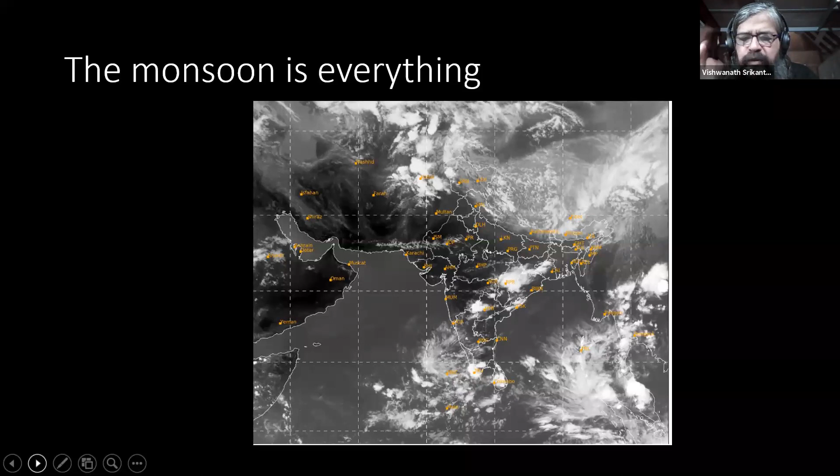What happened here was that the high-rise buildings and the buildings around exploited groundwater. More importantly, the metro which came in put in a station which was 3 to 4 stories below the ground. And for it to not get flooded, it started to pump out the aquifer and throw the water out, because for it, it was a nuisance. And so therefore, urban infrastructure, especially roads and things like metros and underground cables, do not talk to aquifers and do not talk to surface water.

This conversation between roads and hydrology and underground work like metros with the aquifer is also missing in the master plans that we develop for our cities, the land use plans, and the building bylaws that we develop for our cities. So as architects, designers, and urban planners, somewhere we'll have to start this dialogue going if water is a scarce resource and if water has to be protected.

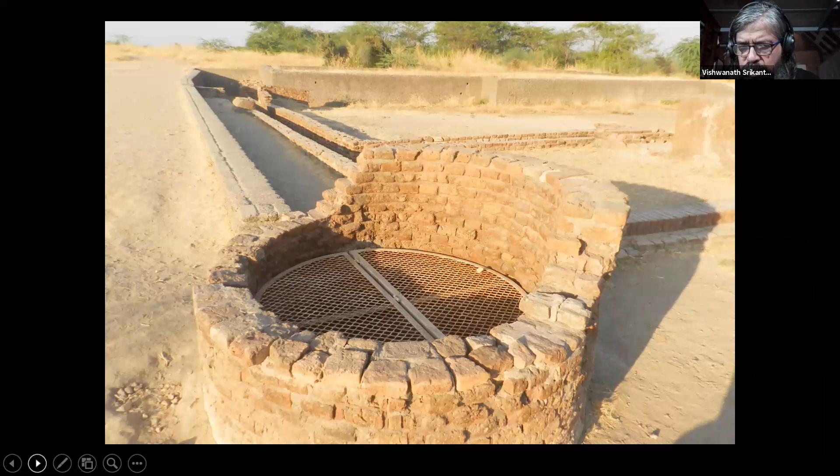Though it's named after the Indus Valley civilization, as it was called, or now referred to as the Harappan civilization or the Harappan Saraswati civilization, the means of drawing water was not from the river. Dholavira had rainwater harvesting systems. In Mohenjo-daro, every third house had a well. Lothal had a good drainage system. This is a picture from Lothal, and a well to draw water from.

And why was the well important? Because the well filtered the water from the river, was a steady place for supply of water, and it gave you clean water at your doorstep. So the science of digging for wells is a very old one. The wells themselves have a 10,000-year-old history. The oldest wells are about 9,000 BC, right? So that's how it is dated, and it's there in part of our history.

Now coming to history as destiny. For my city, as many other cities, we have to get local and understand what happened millions of years ago. So we have rock outcrops in Lal Bagh, which is one of the biggest parks in Bangalore, which are dated roughly 3,500 million years old. And what happened 3,500 million years ago and before that?

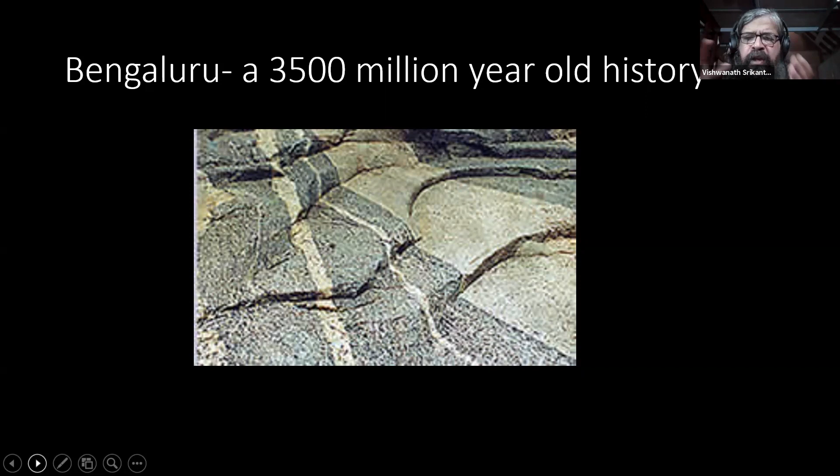The uplift of the rocks, the volcanic activity which caused Bangalore to go up to 920 meters above sea level, which gave us the weathered rock layer and the hard rock layer where the aquifer now stands, which holds water, and the fact that there's no perennial river flowing in the city, is a 3,500 million year old history.

Also interesting for us as a city, and for many other cities to find out their histories for themselves, is that about 100 million years ago, Madagascar separated from the Indian plate. And as the Indian plate moved into the Asian plate and caused the Himalayas to rise, it also caused the Gangetic Basin to sink. And because of that sinking and geological activity, and then the silt distribution which came through the monsoon rains hitting the Himalayas, we created one of the most fertile regions of the world in a continuous history.

So the Indo-Gangetic Basin has had an extremely high concentration of population since time immemorial, right? Since agricultural civilization began. And that fact will impact us now, because as these areas urbanize, we will have very high density of population in already dense regional areas. That's something that history has given us and geology has given us.

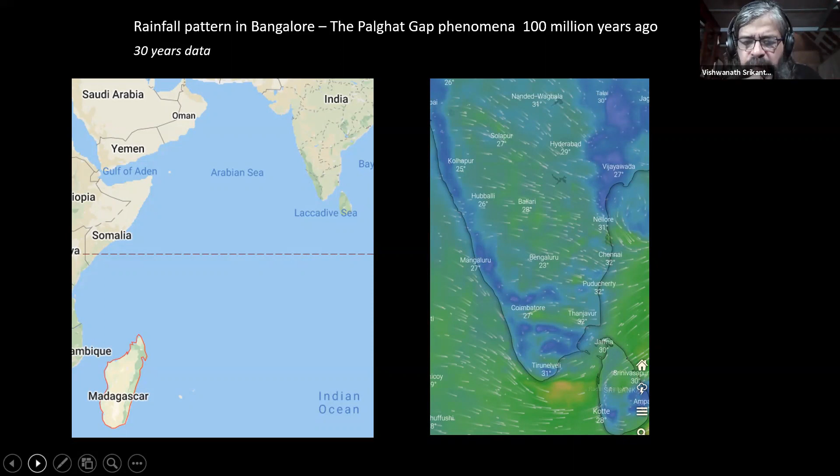For Bangalore, the figure on the right shows you a place called Coimbatore, and just above Coimbatore is a blue ribbon of rain-bearing clouds and water coming in. That's the famous Palghat Gap. So what happens in April and May, and as I speak right now outside, is that the winds from the Arabian Sea blow through this Palghat Gap and drift up north to Bangalore, which is at the highest point, and it rains in May. And we have the summer rains of 111 millimeters in Bangalore, which helps us to harvest rainwater and manage the water requirements of a landscape. This is an accident of history, 100 million years old.

A more recent history comes from the British occupying cities and starting cantonments. The first effort towards piped water supply and piped sewerage starts with the British coming in. Of course, till now, the germ theory of disease is not found. Pasteur has to go about identifying bacteria, and then the germ theory of disease starts in the 1850s. Then starts the emphasis on piped water supply and sewage systems.

So the first piped water supply scheme starts, and in 1894, the city of Bangalore gets water from about 22 kilometers away, a place called Hesaraghatta, and it uses steam engines to bring water to the city. So firewood-based steam engines are used to pump water in. The local water systems like the lakes and tanks and the wells are no longer relevant because piped water is coming into every house, bringing 55 liters per capita per day from a source far away. There begins the destruction of local water bodies, surface water bodies, because there's no relationship now.

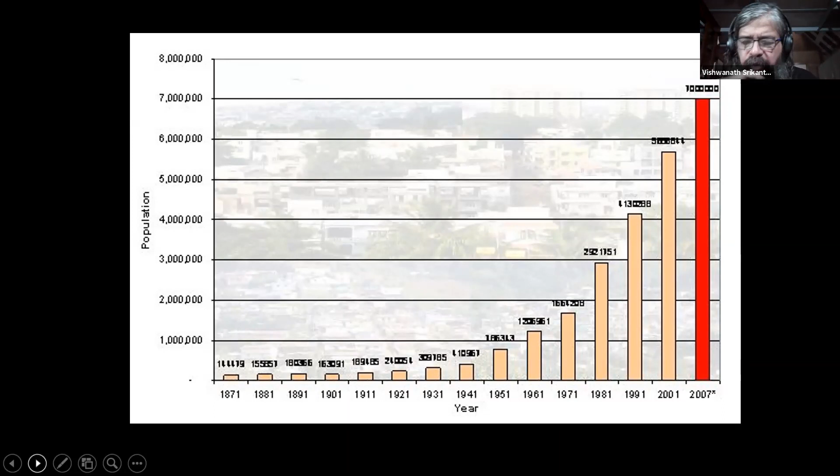And then by the time you package the finances for the next water supply scheme, you find that there's a trough and there's a scarcity of water. So people start to weep about lack of water in our cities till the next major infrastructure comes in, and then it goes on like that.

The other major pandemic which had a phenomenal impact was the plague. 1896 to 1899, it came to Bombay, and then it came to Bangalore. The plague started the first town planning, serious efforts at town planning, and the first efforts at sewage and sewerage systems. So the sewage system started to come in during this particular era in a bigger fashion.

And somewhere along the line, we started to create specialized institutions to manage water and sanitation, because the local governments were no longer capable of throwing in the engineering skills needed to manage water which was coming from great distances and wastewater which was flowing great distances. Right? Now, the Kaveri is the source. The Kaveri River for Bangalore is 100 kilometers away and 300 meters below the city.

So the first specialized water supply and sanitation institution in independent India was the Bangalore Water Supply and Sewerage Board, 1964, followed by the Chennai Water Sewerage Board, the Delhi Jal Board, and so on and so forth. Mumbai continued to have the local corporation. Ahmedabad continues to have the local body governing its water supply. There's no specialized institution.

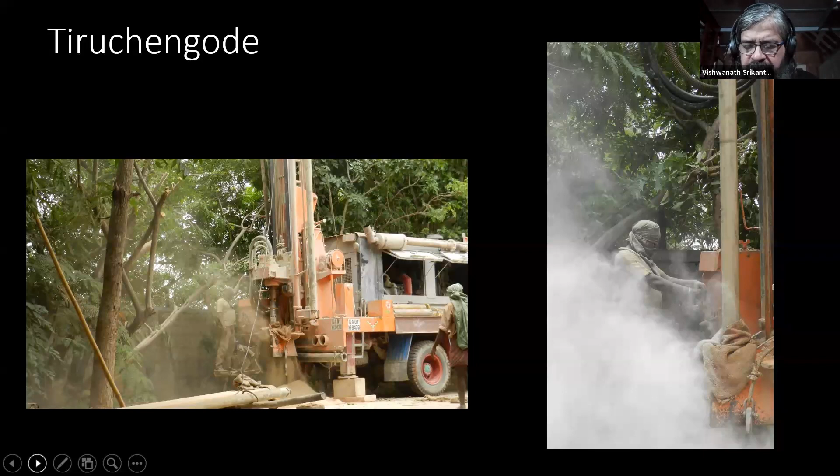What was meant to provide drinking water now enters the agricultural arena. There is free power supply, there's deeper and deeper competitive drilling, and you start to exploit groundwater at unprecedented scales. To such an extent that we now have something like 33 million wells and bore wells. 65% of our total water requirement comes from groundwater. 85% of our drinking water needs. 50% of urban water supply, that's not mentioned here, comes from groundwater.

We extract 250 cubic kilometers, which is more than China and USA combined together. Number 2 and number 3 combined extract 220, we extract about 250. We are the world's largest user of groundwater, and our dependency on groundwater is phenomenal, and the only source of recharge is rain, which we need to remember. Now, of course, treated wastewater also.

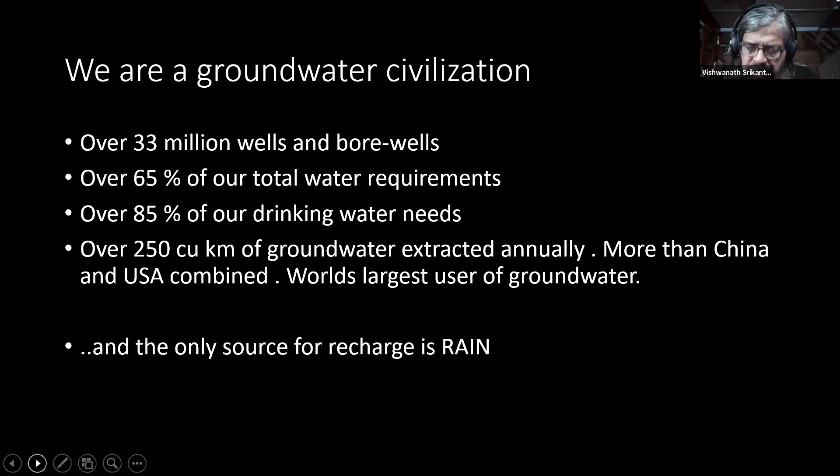So if there is one point that I want to convey to you and discuss with you, it is that India's knowledge of hydrogeology will be crucial to its sustainable water use. Without understanding the geology and the aquifers and the methods of recharge and keeping the groundwater quantity and quality alive, we will struggle. There is an impact on our rivers because most of our rivers will dry up if the groundwater table falls, because they will not be fed during summer by groundwater. Many of the streams in India are fed by groundwater from springs. And with groundwater depleting, rivers will also dry, except during a few days in the monsoon, right?

We also have the oldest canal irrigation system in the world, the most extensive. Started with the British. Sir Proby Cautley and Sir Arthur Cotton are legendary names. There's even a temple to Sir Arthur Cotton. His photograph is hung in the homes of farmers in Andhra Pradesh, along with the gods. And he's worshipped, and there's an annual pilgrimage on his birthday, which was very recent, about 10 days back, where people go and worship him. So people who've brought irrigation water have been worshipped in India. Canal irrigation was one such phenomenon.

The first engineering college in India was started at Roorkee, and it was designed to train engineers in canal building and dam building, canal building especially, and that tradition has continued. Our engineers are specialists in building canals and dams. We also have the largest watershed program in the world, which is soil and conservation works. We have the single largest dependency on borewells. So we have a number of firsts in regard to water in India, right?

And why are our rivers dry? One of them I explained to you is groundwater tables falling. But then the population increase obviously plays a role, not a very significant role, but definitely a role. Food grain production, especially high yielding varieties of grains, wheat and rice, which take 2 to 3 times more water than the local varieties. And then the explosion in food security. I mean, we got to be food secure. We were paranoid about food security. After the Green Revolution, we got food security at a considerable cost to the soil, but also to water. And electricity generation has been one of the key consumers of water, right?

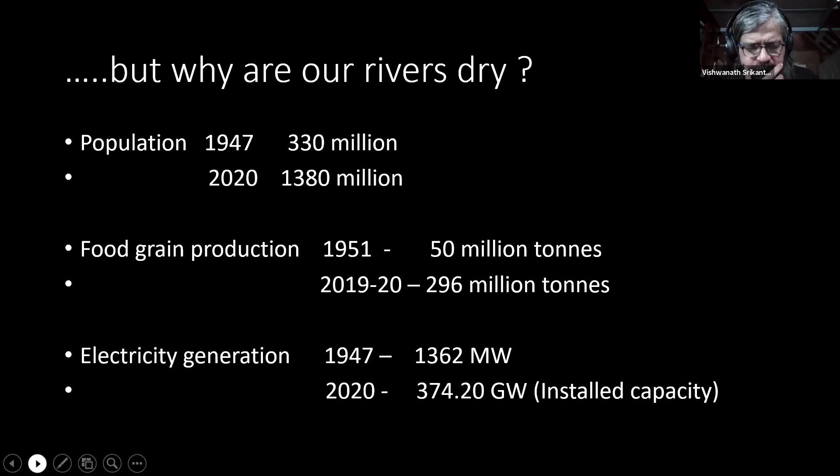And just as an example, we are also building dams at a large scale, 300 or so dams during independence, 5,800 now. 2017 is a slightly older figure, 5,800, near about that in 2021, under construction or being built. And just as an example, wheat alone, high yielding variety, we went from 10.4 to 107 million tons. So we substituted the cereals, millets, bajra, ragi and others with wheat and rice to a large extent. That has had an impact on water consumption, and therefore now our rivers dry up.

So when we get to urban India, we ask ourselves the question, how much water is required by an urban Indian? And this is a question which has not yet been answered, because we have network projects designed for 135 liters, 150 liters, or 200 liters per person per day. And we have an old BIS standard which suggests 135 liters per capita per day. We don't have a normal one.

However, we need to start to work out our own standards, and perhaps it should be closer to 100 or lesser than 100 per capita per day. That should be the standard that we should aim for, because higher standard means higher project costs and higher water consumption. So what do we do as architects and urban designers and planners, right, at a site?

So even if we take a small site to a large city, the resource remains the same. The resource is rainwater, essentially that. Soil moisture, because soil is one of the largest holders of water in the Indian subcontinent and even at a site level. Surface water, which is obviously our lakes, ponds, and rivers. Groundwater, which is our aquifers. Piped water for cities, which comes from far distances from a dam or a reservoir usually. And then there is reclaimed water, that is used water or wastewater.

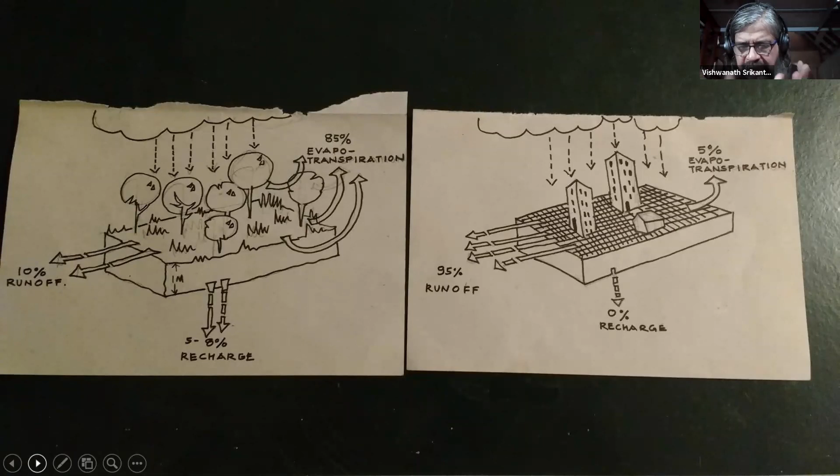The whole idea with rainwater harvesting, therefore, becomes biomimicry. Can we go back to the hydrological cycle before building on the site? Can we make use of that 85% of evapotranspiration water? Can we either hold on to it in some tanks or in the aquifer and use it and then leave it as treated wastewater for it to go back to the atmosphere? That's the trick with rainwater harvesting.

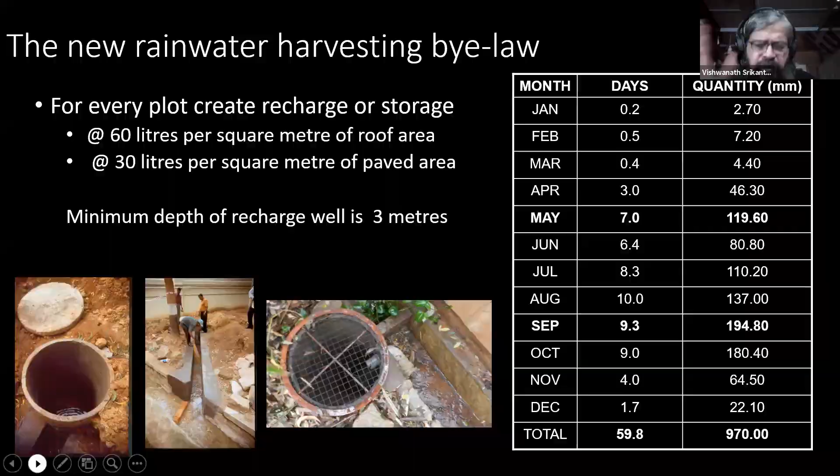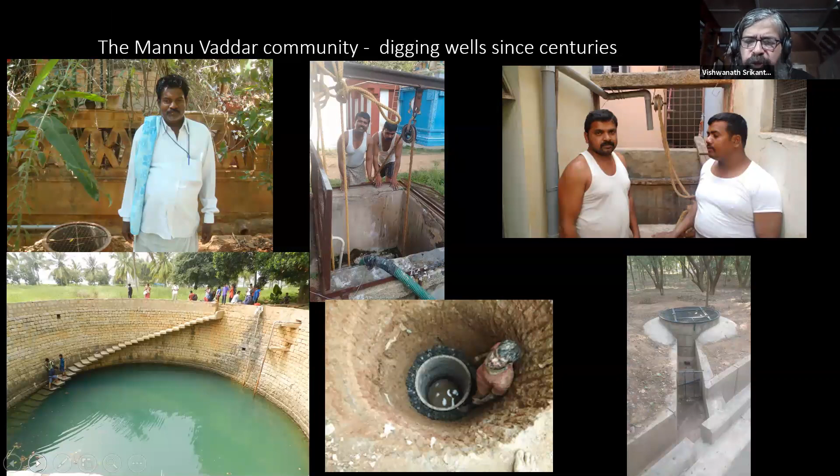In Bangalore, we also have a traditional livelihood-based community, which is called the Mannu Vaddar or the Ode community, who have been digging wells for 1,000 years, right? All across India, they're called Ode in Gujarat, Rajasthan; they've been digging in Kashmir all the way to Tamil Nadu. They know how to dig, how deep to dig, how wide to dig, and how to access water through traditional knowledge. So can traditional knowledge be used with modern designs of rainwater harvesting?

Can these people get a livelihood where they make recharge wells, pick up rooftop rainwater or stormwater, filter it and push it into the aquifer? It's an endeavor which we are pursuing in Bangalore. We think that we can get 1 million wells in Bangalore, and 1 million wells will harvest half of the rain that falls on Bangalore and will create another river below us so that we'll be able to access more groundwater. That's one thing.

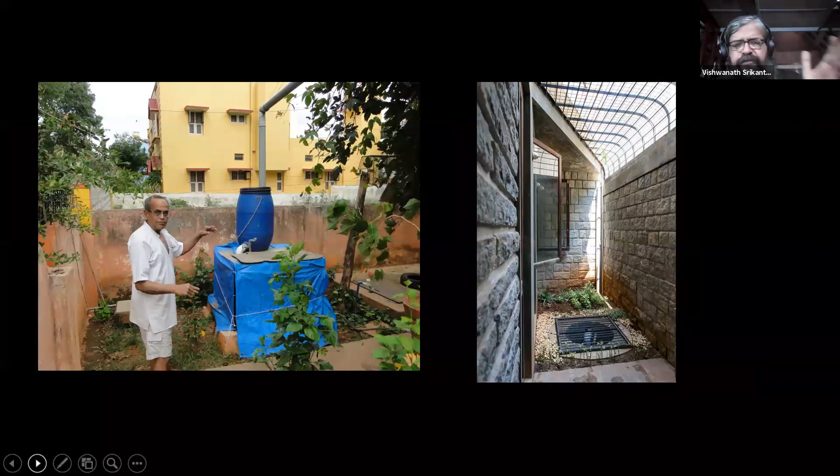This is how the system is done. On the left, you see the rooftop rainwater coming in. The blue drum is a filter with charcoal and sand. It filters in and then goes into the well. The well is covered with a blue tarpaulin. To the right, you see the recharge well, 1 meter in diameter and 6 meters deep, where again the rooftop rainwater is filtered and pushed in. In both cases, the well supplies water to the families throughout the year.

We found that more than 10,000 such wells exist in Bangalore, which still continue to provide water. We want to expand that from those zones where the wells are present, right? So we can work on the hydrogeology. The difference is that the well water costs 75 paisa to 1 rupee a kiloliter. 1 rupee a kiloliter, 1,000 liters, compared to 95 rupees for water from the Kaveri. Right? So local water, local recharge makes economic sense and energy sense.

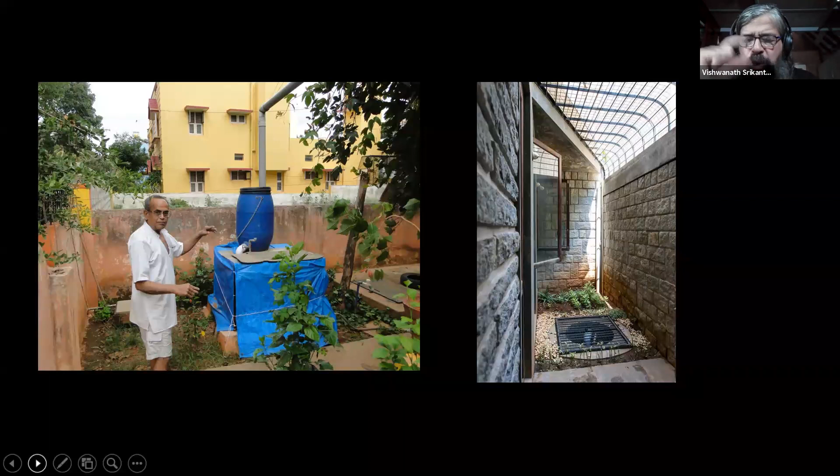The carbon emissions are also less for this water to be pumped. It takes 0.1 unit of energy for well water to reach the overhead tank. It takes 2 units of energy for the water from the Kaveri to come to the cities. So there is a climate change benefit also. So what can we do?

We can be water conscious ourselves in individual homes, use water efficient fixtures, focus on gardening because we consume a heck of a lot of water, use eco-friendly soaps and detergents because we are flushing out a lot of chemicals into our sewage treatment plants, which becomes more and more difficult to clean up. Look at food habits, eat locally grown food. We all know that because locally grown food has the lowest water footprint.

Look at conserving energy because energy and water are linked, and meters and pricing is the best way of understanding how much we are consuming, and pricing sends the best signal for conserving water, right? So for example, you use the Rita nut and you can make your own soaps, detergents, and shampoos. And the reason for this long hair is that Rita which you grow.

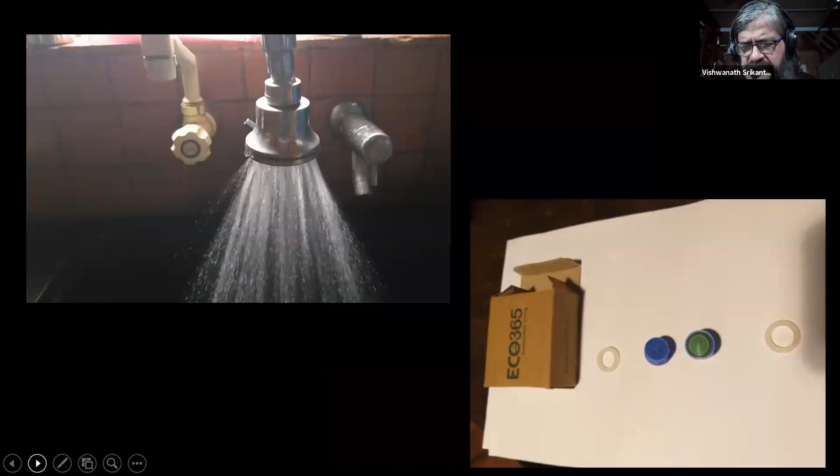What you do is also plant Rita trees in your cities so that you're able to ensure livelihoods for people who collect the nuts and then sell it to the market. And so everything is integrated. And this is what can be done at a local level. And you use showers and aerators. I'll go quickly with case studies now.

Examples of a single house which can be designed to be water efficient, right? What's happening here is this is our house, and we got a basement. You see a recharge well at the left. The basement is there. The basement provides the earth for making the whole house, right? And therefore, the house does not require an AC. It doesn't even require a fan.

Now that we have a dog with a fur coat, we need a fan. Otherwise, we don't need that too.

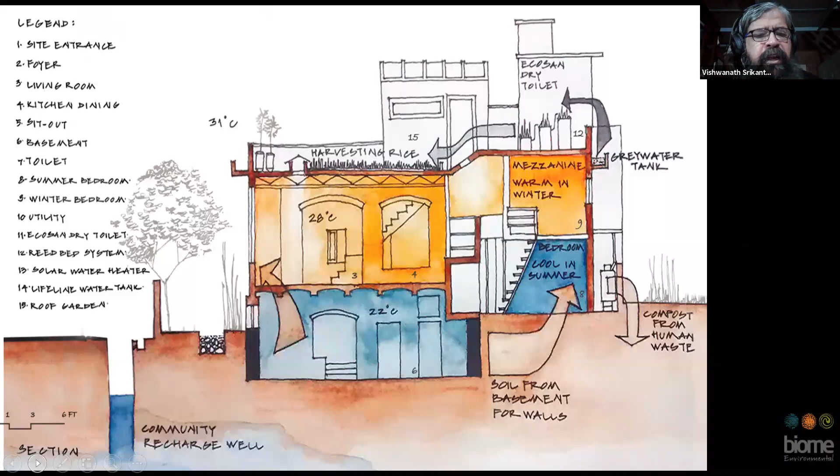It provides us our drinking and cooking water requirement for the whole year. Just a 500-liter barrel provides us drinking and cooking water for the whole year without any treatment. We don't even need a filter, forget a RO system or anything of that sort, just because the rooftop is clean, right? So you see the cleanliness of the roof and the cleanliness of the water. Right now it's raining, my rain barrel is full. I just try to get down 20 liters and it'll last me 2 days or 3 days, right?

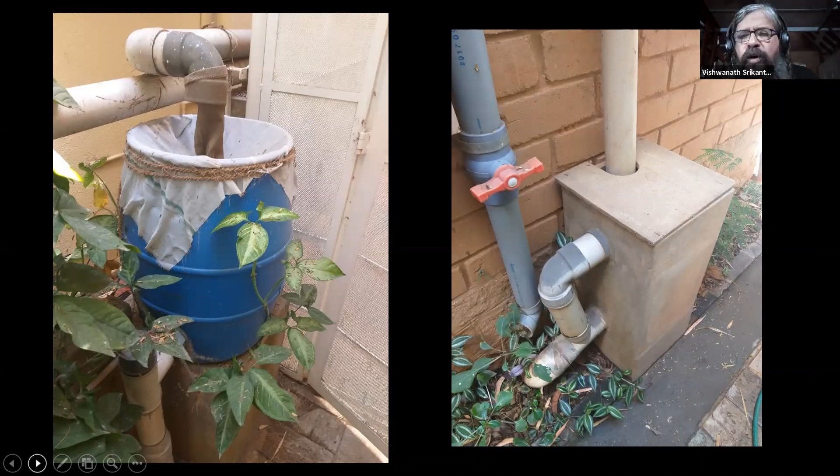Filters can be bought off the shelf. There are many filters now available in the market which do a very good job, or you can do a do-it-yourself like the Dhoti filter on the left, or what I'll show you on the right, which is a charcoal filter. So you just use charcoal and limestone and you push the rainwater through it, and then it gets cleaned up and all the silt gets collected there and the water gets stored in your sump tank and you pump it up and use it, right?

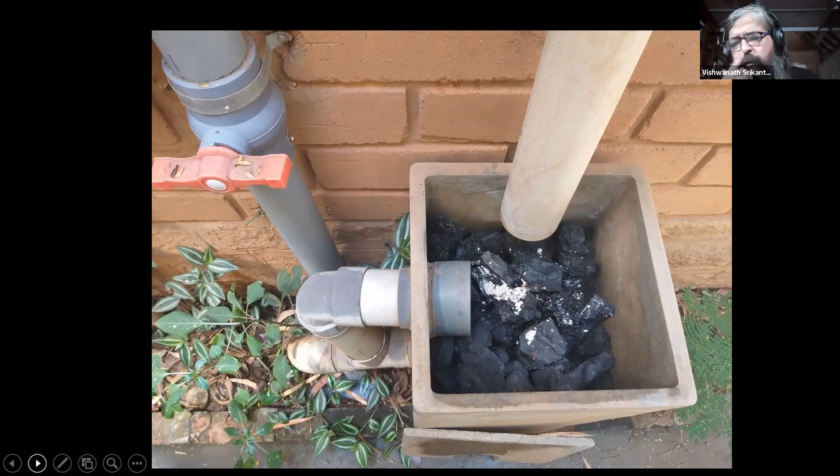So this is how it's stored in the sump tank. A sump tank is mandatory in Bangalore because we get water twice or thrice in a week. So everybody has a sump tank. The same sump tank used for the water utility can be used for rainwater harvesting. So you don't have to invest additional cost, right? And that's how it looks like when it's covered.

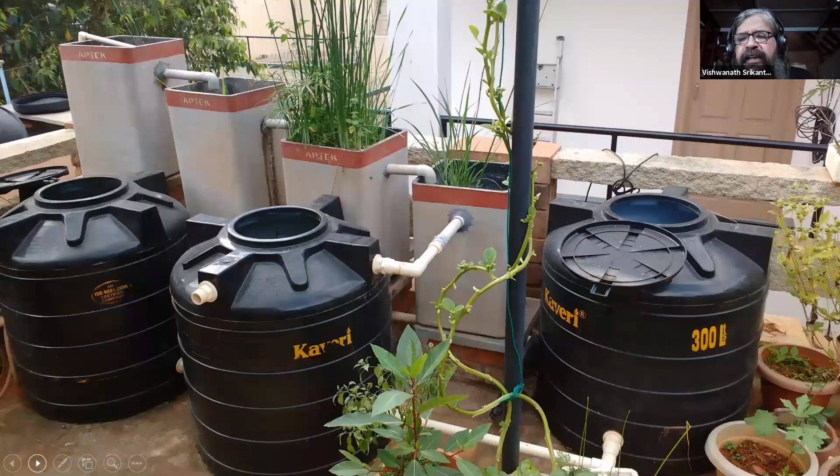This is a grey water recycling system. It's called a reed bed system. What you see on the top left is these ferro cement tanks, one after the other. You pump in grey water. That's the water you collect from your washing machine and from the bath. You pump it into the first one, and then by gravity it goes through those 4 ferro cement tanks at the back. Then it gets collected in these black tanks called the Kaveri tanks.

And this water can then be used for many purposes. It can be used for gardening, the terrace gardening, or it can be used for flushing the conventional toilet below, right? So these simple grey water treatment systems also become useful in a city context.

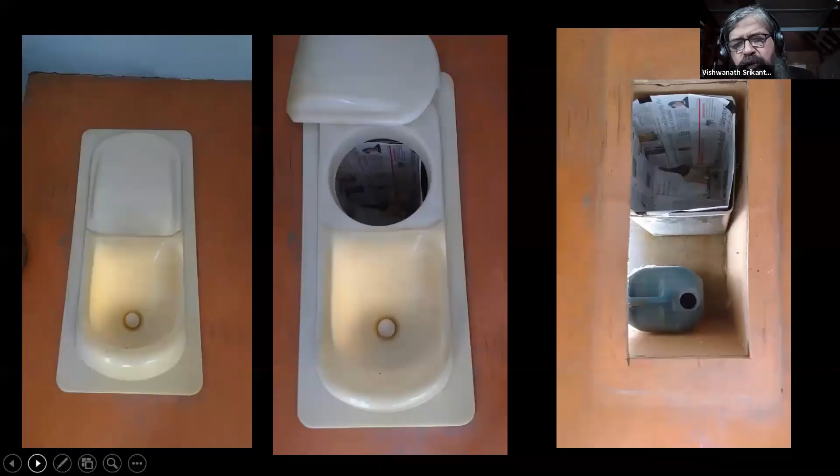EcoSan is something that's a favorite of ours, separating urine and solids. And then the urine is diluted and used as a fertilizer. The solids are composted. This is how a pan looks like. We got the first pan in 2003 from China.

It was quite a wonderful journey through customs to explain what the hell this device was all about. It involved a lot of squatting, but it also involved a lot of merriment. What it shows on the right is a Dalda dabba. And these youngsters won't know what Dalda means, but a lot of us old people will know what Dalda means. It's vanaspati. It's lined with paper.

So therefore, when the solids go, you cover it with ash or you cover it with sawdust, and in the barrel goes the urine. Urine, whenever it's full, you just transfer it to a large drum. The urine can be diluted and applied directly to plants. Dilution should be 1:5 to 1:8. Otherwise, the plants will die. It's very rich in NPK. Right? And then you can grow stuff like rice on the terrace.

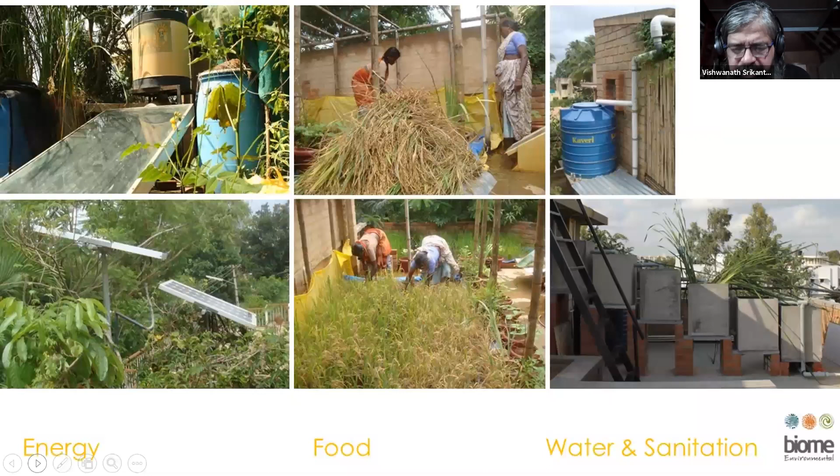This is rice growing on the terrace with the compost from the EcoSan toilet and water from the grey water systems. You get 4 crops of rice, 1 kg per square meter, great productivity. You can actually transform the rooftops. What a rooftop can do is to generate energy through solar water heaters, solar photovoltaics, generate food as in the center, generate water, treat wastewater, and be helpful in day-to-day living.

So a typical roof in Bangalore of 100 square meters can generate 100,000 liters of rainwater, can grow 200 kgs of rice and vegetables, recirculate 100 liters, etc. I described whatever it is. And then biodiversity can also be attempted because the rice that you grow, the squirrels will get to it, the birds will get to it. There'll be very little left for you, but that's all fine.

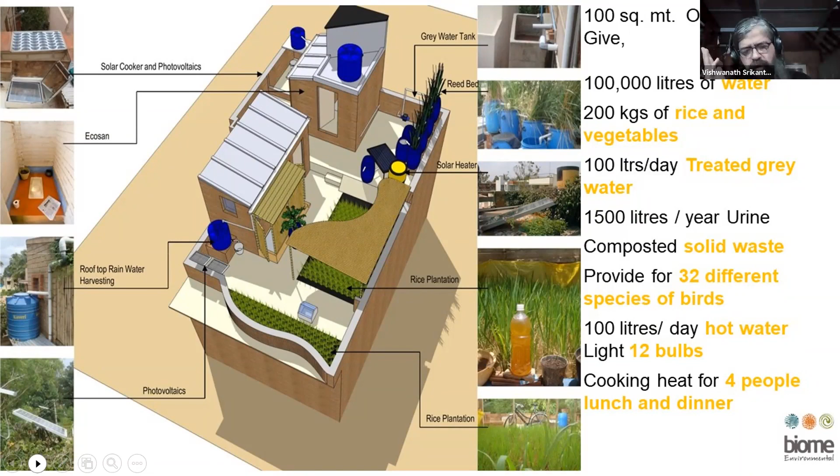Insect biodiversity is one which is under great stress. If there's some space provided for bees and insects, you're doing a great job for nature and biodiversity. So redesigning roofs is something within our control, and I think we should, as time goes by, provide more and more attention and hopefully have green roofs all across the city. Right? So this is a lousy job with a paintbrush on the roofscapes of Bangalore, but you can do a better job with actually getting green roofs all across the city through policies, bylaws, as is being done in many cities. And we can think about it.

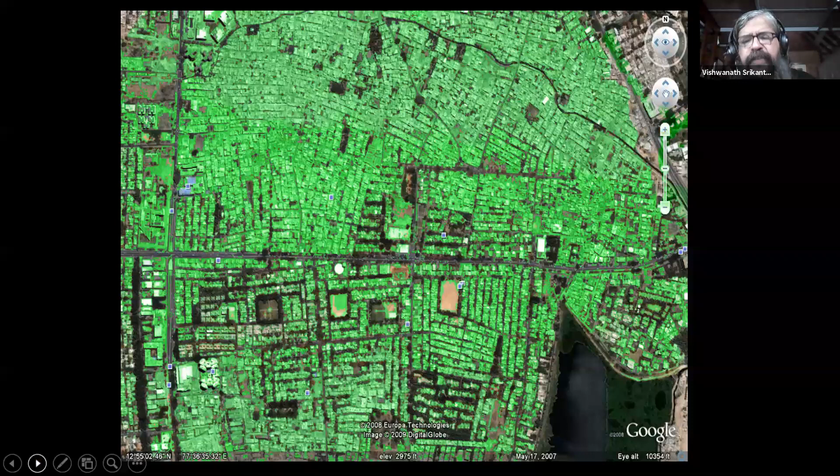360 straws into the same Coca-Cola bottle, each competing with the other, and pretty soon the Coca-Cola bottle is empty, no water, and then you depend on tankers to get your water. A rich community completely dependent on tankers is not something that they would want. So what did they do? They banned private borewells. They put 3 or 5 community borewells, now about 3 functioning. They put in a meter for every household, and they shared equally all the aquifer water. And they priced the water.

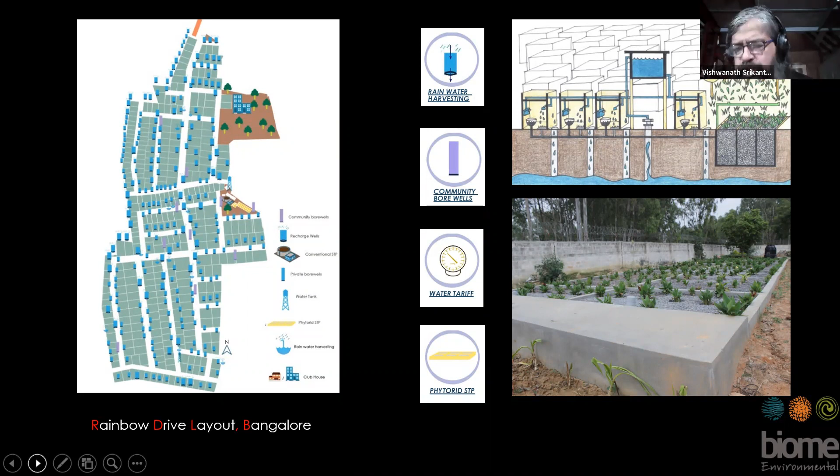So now 360 straws putting Coca-Cola back into the bottle and only 3 straws drawing it, measuring how much is being recharged, measuring how much is being drawn, making sure that recharge is more than what is being drawn, and then investing the excess money in wastewater treatment plants, doing all the calculations. So I'm just showing you the sheet as a reference. You have to do the maths.

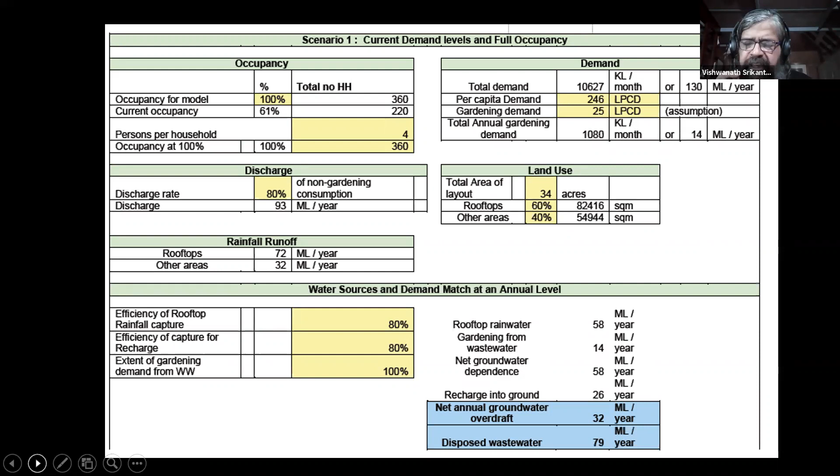You have to figure out how much is being consumed per capita. You have to drive down, through pricing and metering, the consumption to what is sustainable within the carrying capacity of that area, and then put in place those prices. And with the monies that you get, you invest in a wastewater treatment plant and you supply treated wastewater to the households so that the net fresh water becomes less.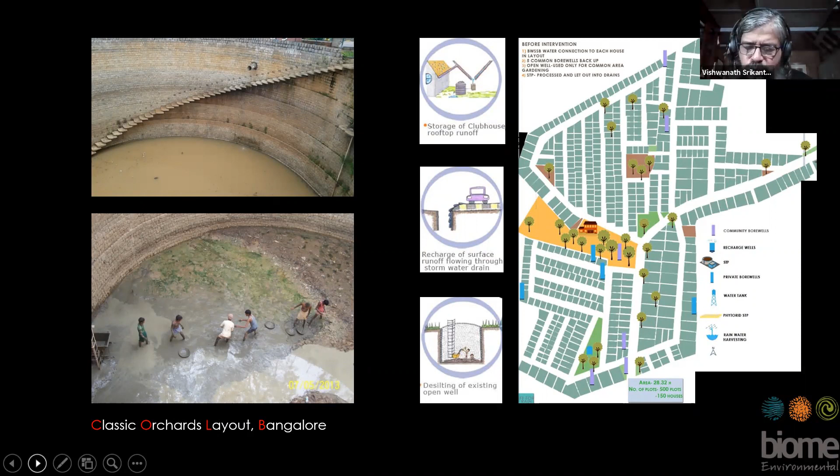Another community cleaned up its beautiful old open well, about 100 to 120 truckloads of silt, and gave it to the gardens for application. The well now has enough water to last for 6 months for the community. This is 28 acres. So gated communities like this can also attempt being self-sufficient for water, but also being net providers of water, right? What do we do at apartment scale?

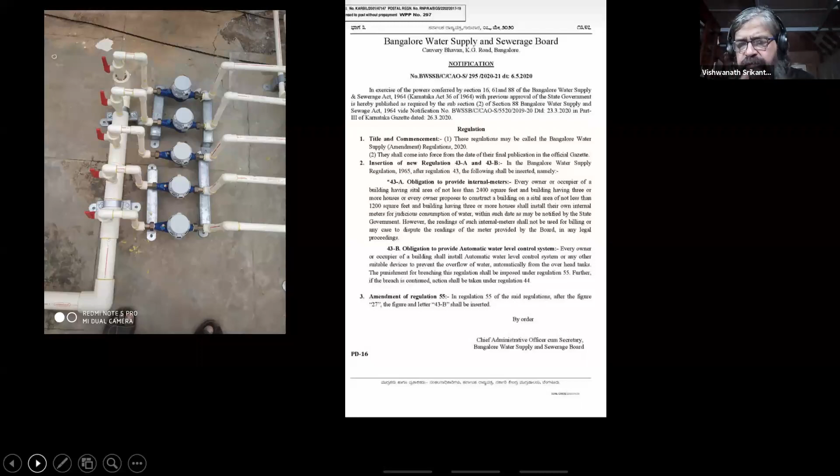And what they did was they put meters in every flat so that every flat is measured, so you know what the consumption is. Now it is by law. It's a law that if you have a set of flats in Bangalore, 3 or more, you have to have a meter, and the meter has to be read on a monthly basis. Metering and tariff is really crucial to managing water at apartment levels. It's really, really essential to do that.

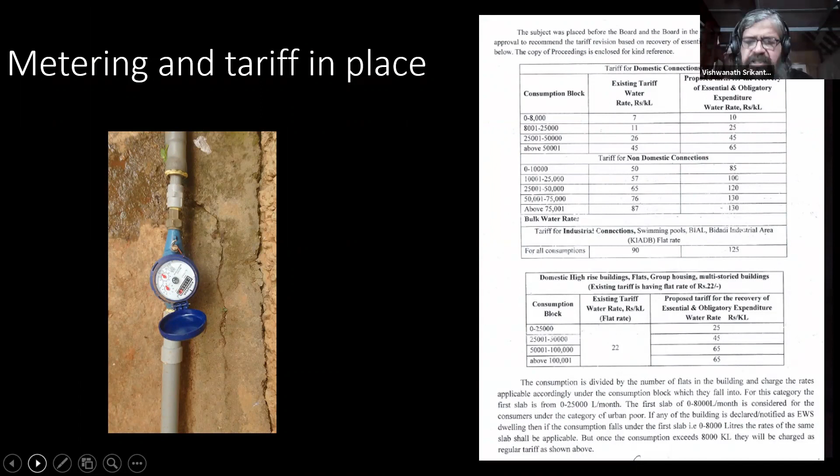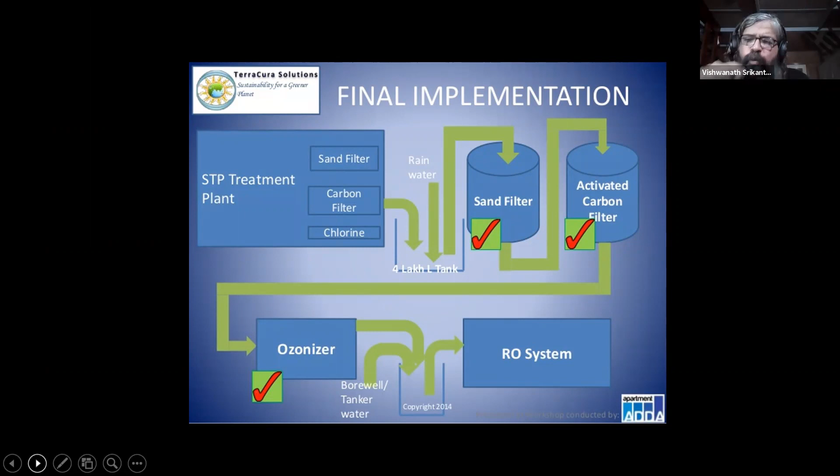Otherwise, there's competitive consumption. And what T-Zed did was to set in place a wastewater treatment system, which included a sand filter, an activated carbon filter, an ozonizer, and an RO system, all designed by Srinivasan Shekhar and other residents, which meant that they could take their wastewater, blend it with groundwater, and drink it. This is the first set of apartments in India that I know of which is drinking their own treated wastewater. They've been doing it for around 10 years now.

The Pollution Control Board has also been happy with what they have achieved, right? This is brave new India. This is where I think a lot of our cities and apartments will have to go, and we'll have to look at taking wastewater and drinking it, right? So what will the bylaws and regulations do? They'll have to mandate rainwater harvesting, wastewater recycling, groundwater management, metering in every house, and automatic switch off pumps. These are all now bylaws and policy.

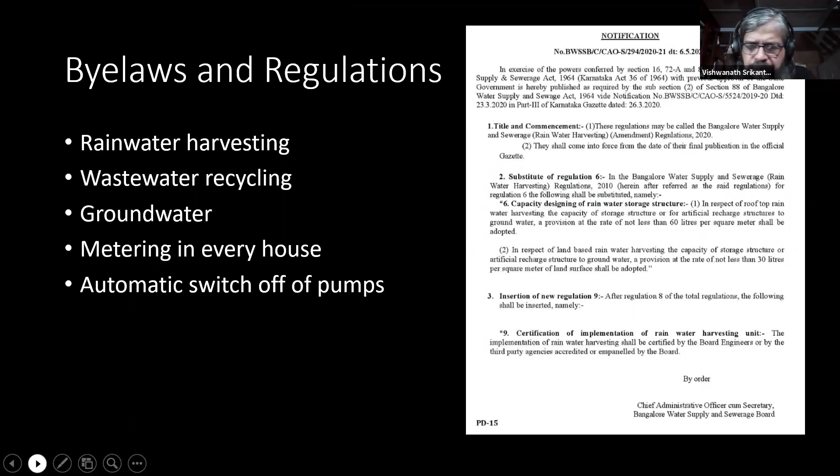So I'll just share this with you. These are all mandatory. All those things that I said: rainwater harvesting, wastewater recycling, metering in every house, putting in an automatic switch on and switch off pump. Right? So let me leave that. Let me get to some of the interesting bits, which is what's more interesting to me.

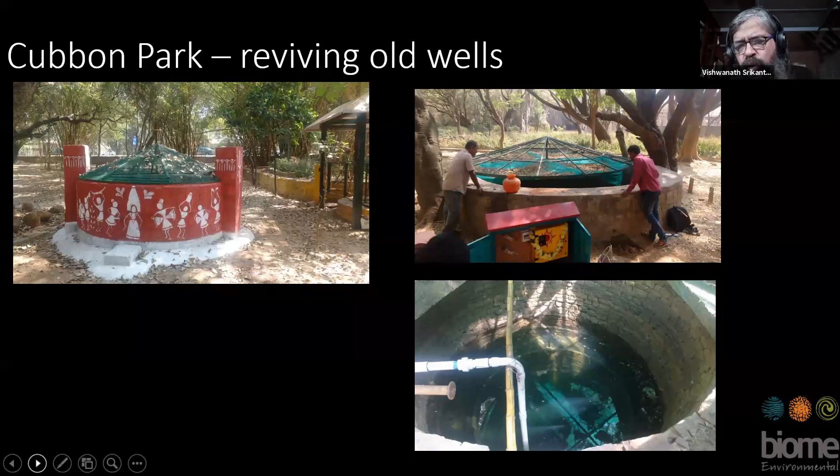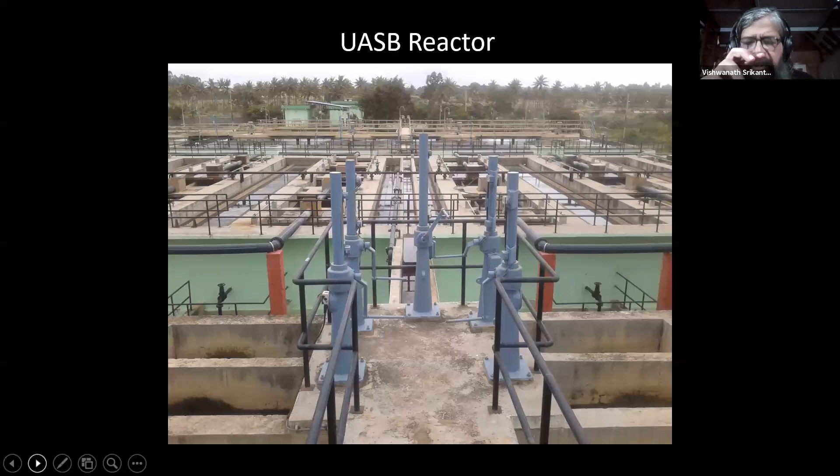The sludge in the sewage treatment plant is a great resource. The sewage treatment plants need not be cost zones, they can be revenue zones if the sludge is managed well. This sludge sells for 10,000 rupees a truckload. 2 truckloads a day are generated. 20,000 rupees comes from the sludge itself if it is sold as manure and if it's managed and checked for heavy metals not being there, right? That's the quality of the treated wastewater.

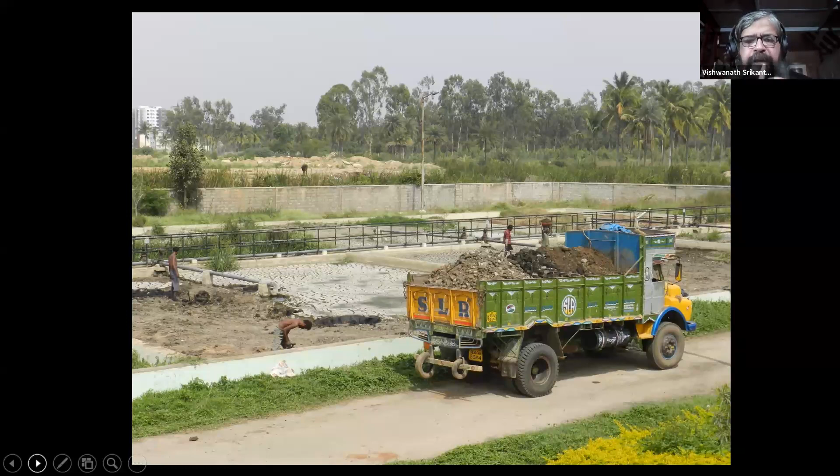Now it's an integrated fixed film system. You see the one on the right. It's very good quality water. Treatment is very nice. Phosphates are also removed, less than 1. It comes into the constructed wetland, right? The treated wastewater comes into the constructed wetland.

The constructed wetland is a great biodiversity spot with the river birds, small mammals, reptiles, birds, plants, everything. It cleans up the water further. That's how the constructed wetland looks like. That's the polished water coming in from the constructed wetland into the water body, into the lake, right? And this is how the lake looks like.

The lake provides livelihood for fishermen, a fisherman's cooperative. 200 to 250 kgs of fish can be harvested on a daily basis if the lake water is maintained. The fish provides proteins for all the Bengalis and Malayalis in Bangalore and for others who eat fish, and everybody's welcome. You get a Bengali cut, which is in 3 pieces, and mustard oil is recommended with the fish from treated wastewater. It's important that the fishermen also become partners.

They make sure that the water hyacinth is removed from the lakes as and when it grows. It's a once in 3-year activity. Water hyacinths are good to remove heavy metals and nutrients, but water hyacinths are bad if they overrun the lake. The fishermen do the job. Right now, they're doing it in Jakkur Lake also. Then the birds return, the pelicans have come back. That's how the lake looks like right now, a gorgeous site, Jakkur Lake.

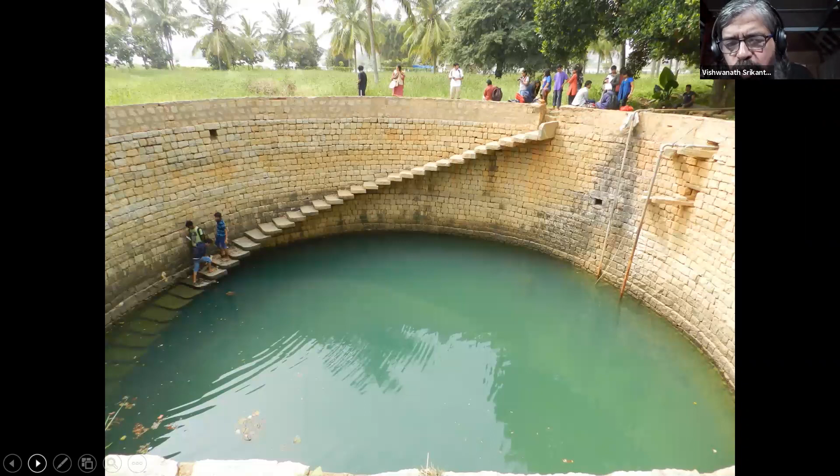This is what you want to aim at. You want to make sure that wastewater is treated, lakes are restored, birds come back, biodiversity comes back as much as possible, coots, purple moorhens, you name it, pelicans, everything, and that the groundwater is restored. So then the wells get full in the surrounding areas. This is now drinking water. Wastewater has been converted to drinking water through a process of conventional treatment and ecology and biodiversity and rehabilitation.

What do we do with wastewater now, right? So we talked about watersheds, and this is the favorite part of my story. I hope you'll enjoy dinner after what I speak to you. Here's farmer Muniraju. Now, well diggers are part of the solution for water. Fishermen are part of the solution for water. Farmers are also part of the solution for water.

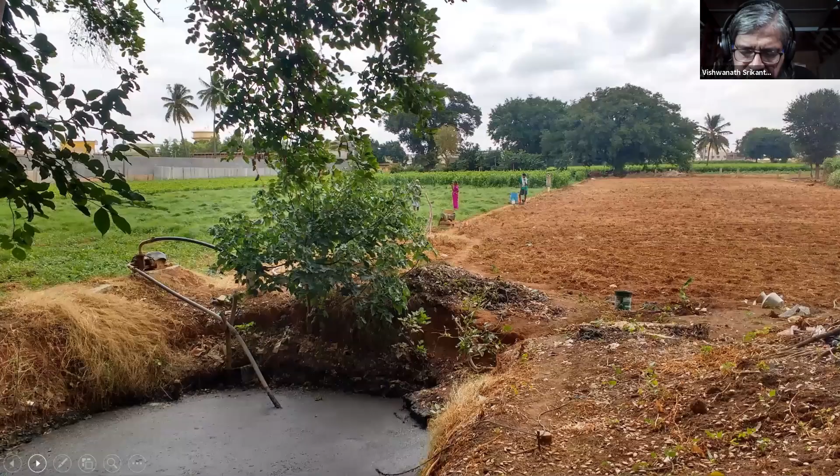What does Muniraju do? He picks up untreated wastewater from the town of Vijaypura, untreated wastewater, into these kind of ponds, allows the water to settle, then pumps it, untreated wastewater, into his field, uses furrow irrigation, not flood irrigation, furrow irrigation, and is growing a lovely crop. It's a non-edible crop. What is this crop? The crop is mulberry. You see acres and acres of mulberry.

From the whole Vijaypura town, all the untreated wastewater is consumed by the farmers and converted to mulberry. Lush green fields right throughout the year. Mulberry is a perennial crop. You harvest it every day for 365 days, 366 every leap year. And in that leap year, you feed the silkworms. Not only in leap year, you can feed it in every year.

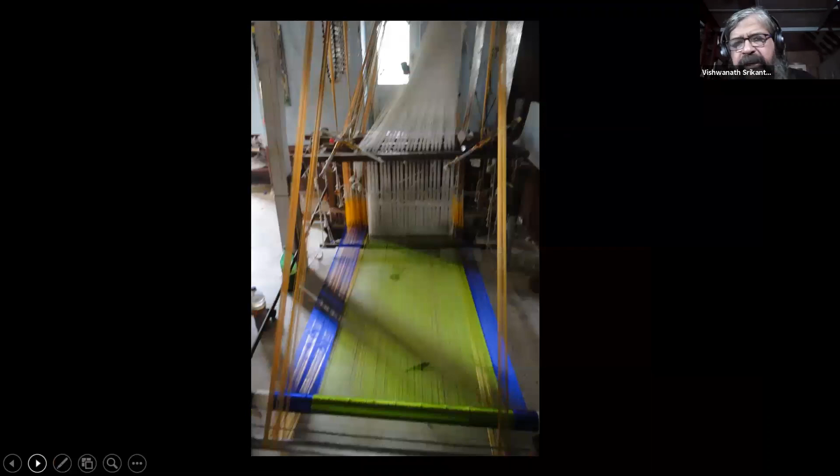The cocoons are woven into yarn and they become saris, and then you have shit to silk. So a farmer and farmers' fields of Vijaypura have transformed untreated wastewater to the beautiful silk saris, the Mysore silk saris, providing livelihoods to weavers, providing livelihoods to farmers, to cocoon rearers, and solving the problem of a town.

These kind of compacts, which are informal, need to be formalized to eliminate any health risk or environmental risk and make sure the whole process is safe. Muniraju himself then becomes a rich farmer, has cows now, can send his kids for education.

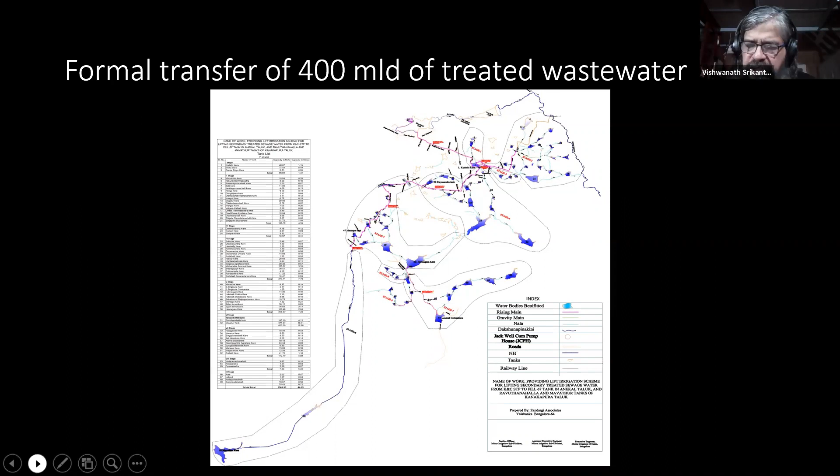This example of Muniraju is now being followed at a greater scale by the city of Bangalore, where all the treated wastewater from all the sewage treatment plants they have is being shipped to the hinterland, which is drought affected, the districts of Kolar and Chikballapur, subject to climate change. Bangalore has a series of wastewater treatment plants, close to 36 in total now, the numbers have increased in each one of the valleys. The valleys on the right bottom, the brown colored one is K&C Valley.

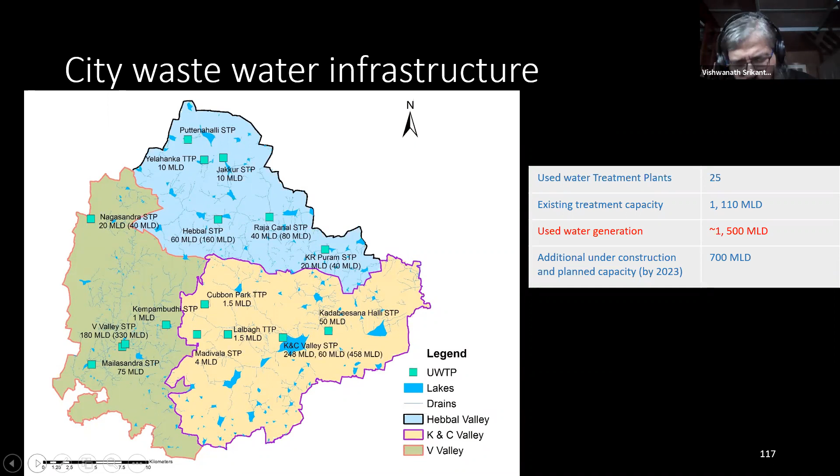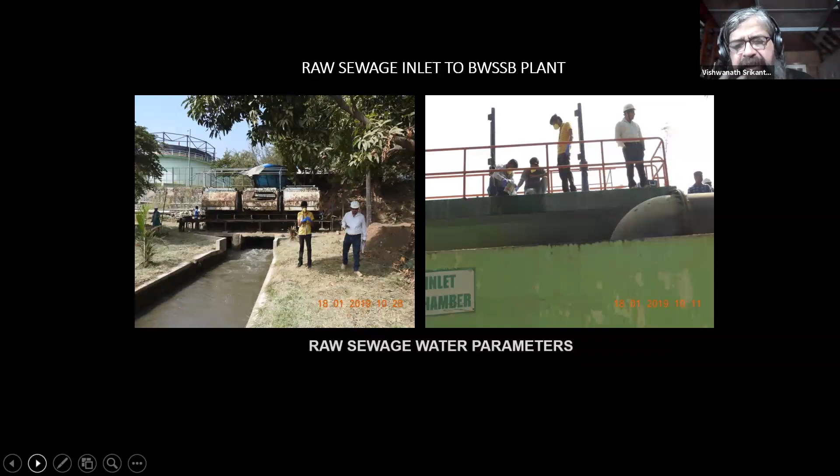Here, the wastewater treatment plants look like this. That's the sewage treatment plant. That's the raw sewage coming in. There's a particular characteristic to the raw sewage. You monitor the parameters and make sure that you achieve treatment levels to meet norms for irrigation. There are norms of treatment which is meant for irrigation.

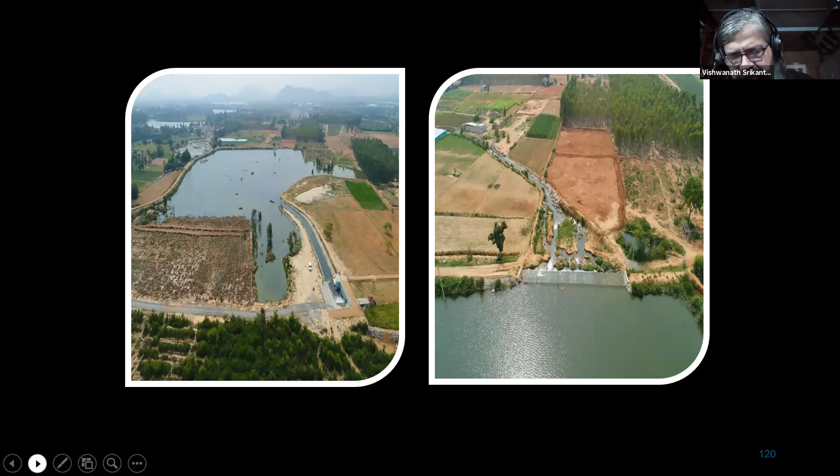This treated wastewater is now pumped 52 kilometers and starts to fill the lakes of Kolar. 137 lakes are to be filled. Already 100 lakes are full. You can see the one on the left. That's the first lake. Treated wastewater from the city filling the lake. Cascades down in a series of lakes like so.

So it goes by gravity, fills up 6 to 7 lakes, then is picked up from the bottommost lake and again pumped to the ridge line. Again, it fills up a lake, set of lakes. So through 5 pumping stations, you fill up 137 lakes. Right? So these are the names of some of the lakes.

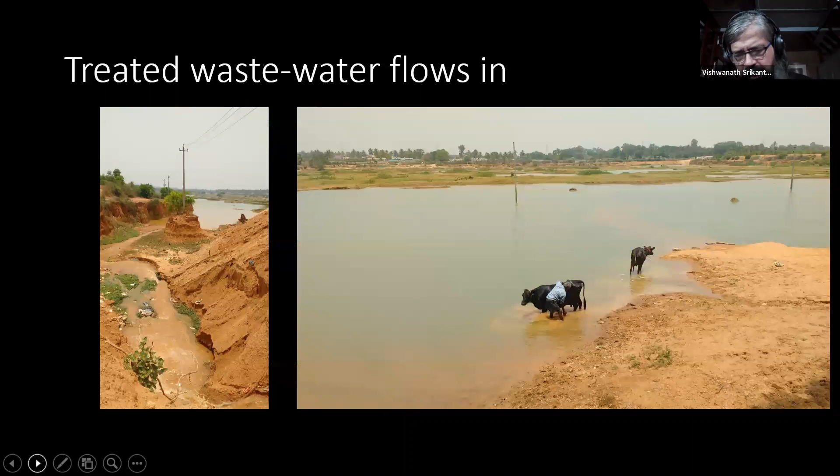The treated wastewater is used for washing cattle. Cattle can drink from it now. That's how it looks like when it comes into the first lake, the treated wastewater. A bit of chlorine dosing is done to make sure that there's no bacteria in it. Fishing is allowed in the first lake. The fishing, as I said, is a bioindicator also.

Farmers are not allowed to take the wastewater directly. They're allowed only to take it from the groundwater. So the lakes fill the aquifers, and from open wells and bore wells you're allowed to take the water, right? And from this aquifer, you can grow edible crops also. With untreated wastewater, you grow mulberry. With treated wastewater, you grow cucumbers and all sorts of plants.

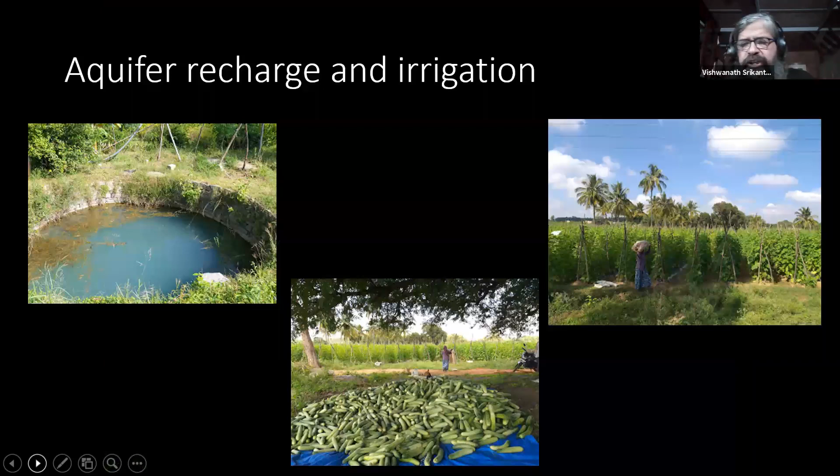And so farmers are now becoming livelihood secure, climate change secure. The city is becoming food secure through the use of wastewater which it has generated. So cities are now becoming water factories and fertilizer factories, providing livelihoods to farmers and securing food security to themselves in an era of climate change through wise use.

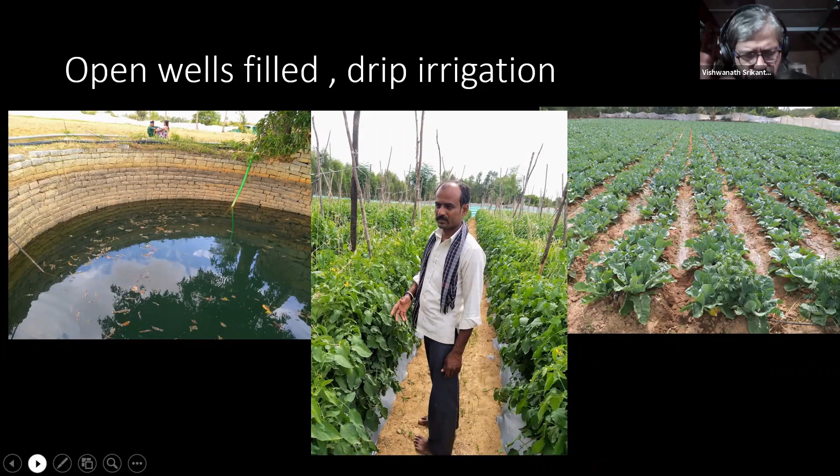The last point that I want to discuss, I'm already at 45 minutes. In the next 2 minutes, I hope to finish.

This beautiful truck called a honeysucker. It's a vacuum sucking truck which picks up honey from pit toilets and septic tanks, like so. There are more than 500,000 pit toilets and septic tanks in the city of Bangalore. Many towns in India do not have sewage networks. They have pit toilets or septic tanks.

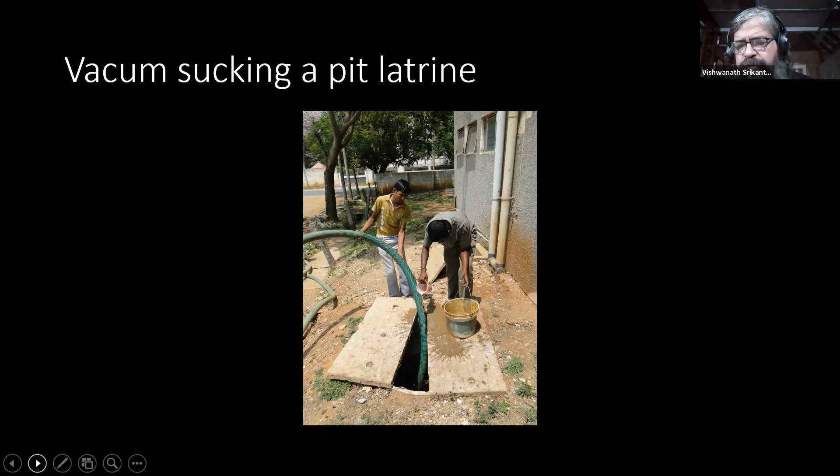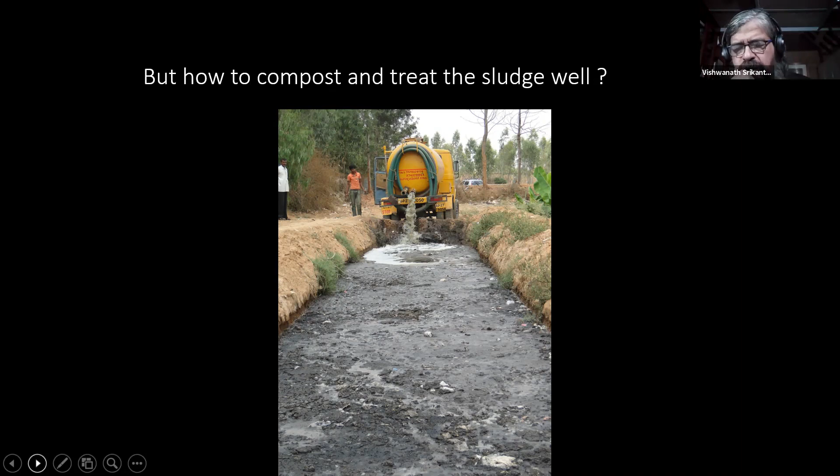The honeysucker comes in, eliminates manual scavenging, is then taken by farmers and they compost it using compost pits. It's lined at the bottom so that there's no groundwater contamination. And in about 8 to 10 months, you have excellent manure, which is then blended with farmyard manure, cow manure, and is used for plants. It sells for 1,500 to 2,000 rupees a tractor load.

And then you grow the best fruits. Bananas are great, for example, or grapes, which make wine. So this is shit to wine. If that was shit to silk, this is shit to wine. So again, compacts between farmers and the city, generators of what is called waste, but what's actually a resource for the farmer, is something that cities and habitations in India will have to drive at.

So if you pay the true ecological price for water, that is when you return it back to nature the same quality and quantity at which you appropriated it, you can put it through an endless loop and therefore you will not suffer from water scarcity or wastewater scarcity. And so what is the approach that is recommended at a larger scale?

Elinor Ostrom, the Nobel Prize winning economist, she suggests the management of the commons. And there are 10 rules according to her. Think about institutions. Always think about the kind of institutions that will deal with a particular problem. Pose social change as problem solving.

Embrace diversity. Every habitation, every city will be different. But within that, be specific about the solutions, how you will do the partnership. Listen to people, listen to well diggers, listen to fishermen, listen to farmers. Self-government as possible, like the gated communities show and at other scales the farmers are showing.

Everything changes. Be prepared for a dynamic world. Map power, because that's what controls everything. Collective ownership can work. It need not be the market and every man or every woman to herself or himself. Human beings are part of nature too. So therefore, think of ecological regeneration as you think of solutions for agriculture and water.